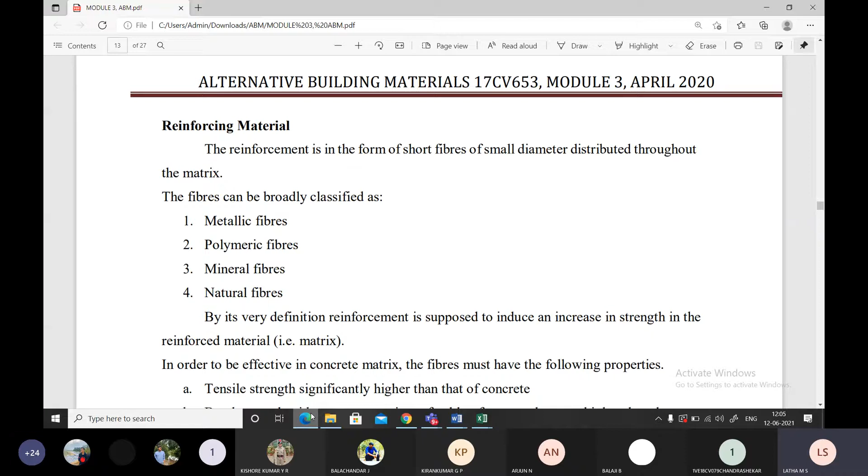Fibers basically depend upon the aspect ratio. Aspect ratio - I think you have heard about this word, correct? Yes or no, students? Aspect ratio.

Okay, tell me about slenderness ratio. Length by diameter, yes, height. It is nothing but column - for a column you will be referring, isn't it? Your height of the column to the least dimension of the column. If it is rectangular, you will take the least dimension, whether breadth or depth. So what is the aspect ratio of the fiber?

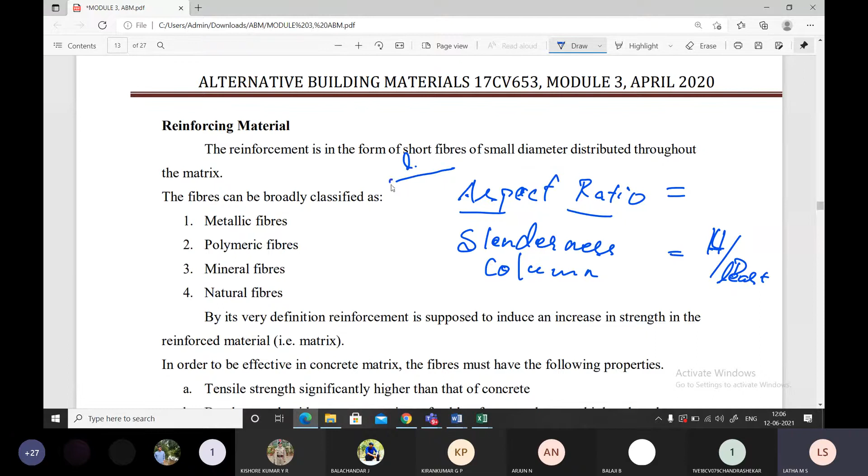Fiber, on similar lines - what does the fiber have? It has length and it has diameter. So what is the aspect ratio? L by D. L by D.

This aspect ratio, in your research work if you are using these materials, the high scope is involved in the aspect ratio. You may say, ma'am, I've used the concrete or mortar as we have discussed, and further to increase the tensile strength - fibers, why do we introduce fibers?

To increase the tensile strength, I may add metallic fiber, polymeric fiber, mineral fiber, or natural fiber. But on what basis do you add, students? Because each fiber may have different length, different diameter - one may be thin, one may be thick, and all that. So to define all that, we call it the aspect ratio.

So your research may define it - if you are taking a metallic fiber available in market, you can purchase it online or go to a shop. You may ask the aspect ratio of that metallic fiber, ranging from 0.3 or 0.35, or keep a range, and take those metallic fibers, pour it into concrete and check the strength. For varying strength, for example, I get an aspect ratio.

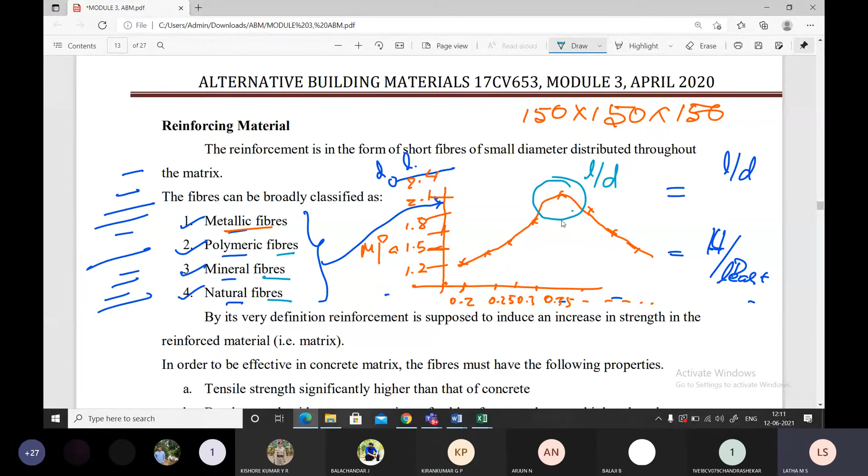You can readily think of doing a project on these - you have a project problem available here for your 8th semester I'm talking about. Okay students, so now with this, did you understand what I'm talking about? Did you follow? So I can make a calculation and determine the strength for varying L by D ratios of metallic fibers or polymeric fibers or mineral fibers or natural fibers.

You may ask, ma'am, where is it available? It is all available in the market. Got it, students? Did you get my point?

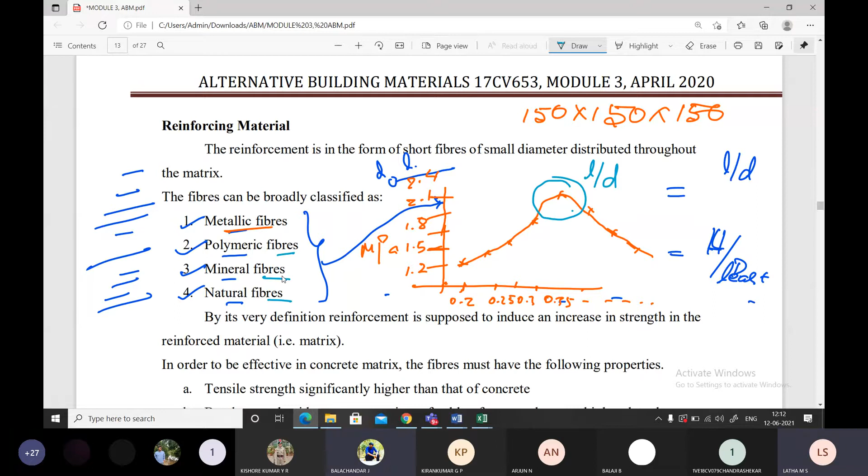Yes or no? Yes. Yes.

Now, to start with, we are talking about what properties fiber must have in order to be effective in a concrete matrix.

Tensile strength. Definitely, when I use fibers, I'll increase the tensile strength. You may ask, ma'am, how does tensile strength improve?

See what happens. For example, take this 150 by 150 cube. Picture that cube in your mind. You have that picture in your mind.

Now, usually you don't put any reinforcement for the concrete cube, correct? You just pour the concrete and test it, correct? And how does this fail? Students, if you remember, how does this fail? Fails in compression is your answer.

But how does that actually fail? I'll tell you, it will fail in shear. It will go like this. The corners will fail like this. You can see the corners will spall out. This is the type of failure you may find.

Suppose I have the same block, 150 by 150 by 150. Do you understand what I'm saying? So I'll cast this cube using this concrete, and along with that, I'll use a mineral fiber or polymeric fiber. I'll use a different color and insert some metallic fibers.

Then what happens? You may find that the crack which was originating in the form of shear may continue to originate, but it may not propagate. It may start originating, but it may not propagate. Understand? What happens there? I'll take this surface.

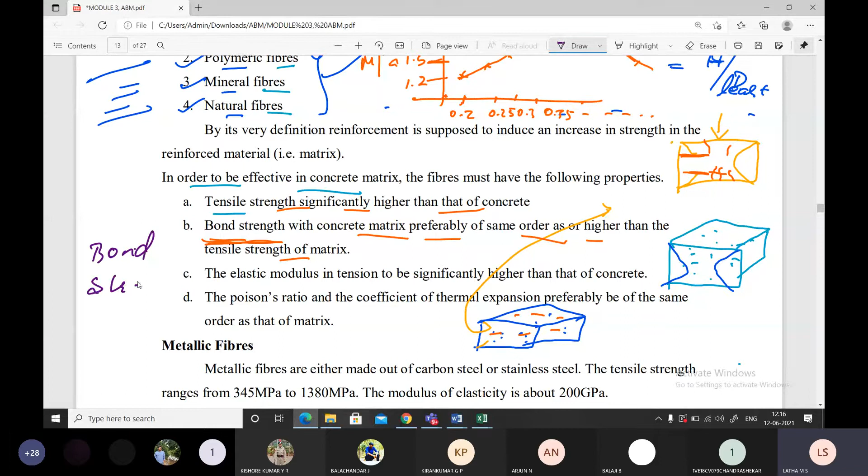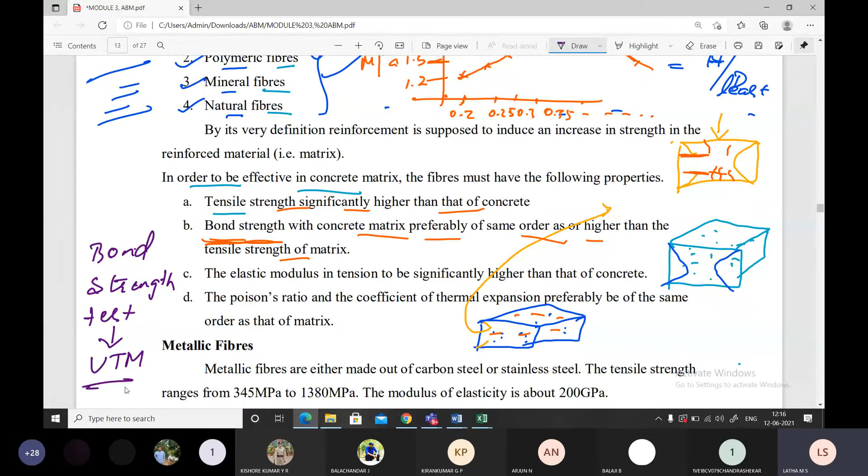You have a specific bond strength test. For this, you have a machine—not a separate machine. You have your UTM machine itself. The UTM machine itself is the bond strength test machine to demonstrate this.

I'll take another minute to explain this. I'll take one separate sheet, students. One second, please wait. I'll take this working sheet. Sorry.

Yes, students, coming back. I was talking about the bond strength test. Did I tell you about this bond strength test earlier? Yes, we conduct it on the UTM. The specimen is this way. For concrete only, I'm telling you students, you have concrete here—pure concrete, not reinforced.

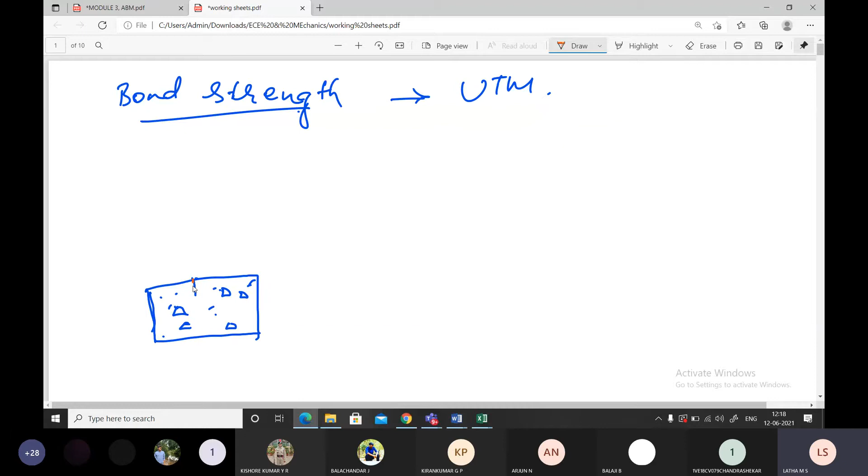And here you should make a dent. You should make a dent—I'll use a different color. This is a dent. You'll be making this dent here during casting only, and you have a reinforcement.

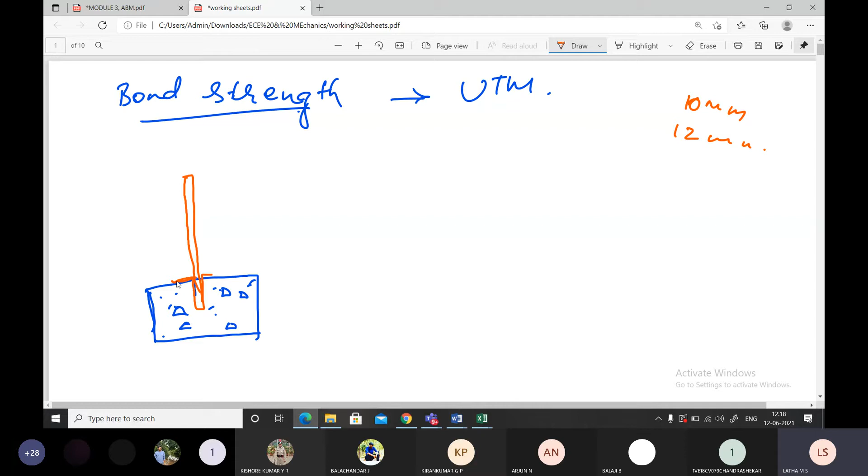If you are using, say, a 10 mm or 12 mm diameter reinforcement for casting, you have to insert this completely into the concrete. Then you have to seal it, seal it completely. Correct? That procedure is given in the ASTM code.

In the ASTM code book, you have this bond strength evaluating or determining test method. Got it? Are you getting the picture, students? This is 150 by 150 by 150 mm size. Do you follow this?

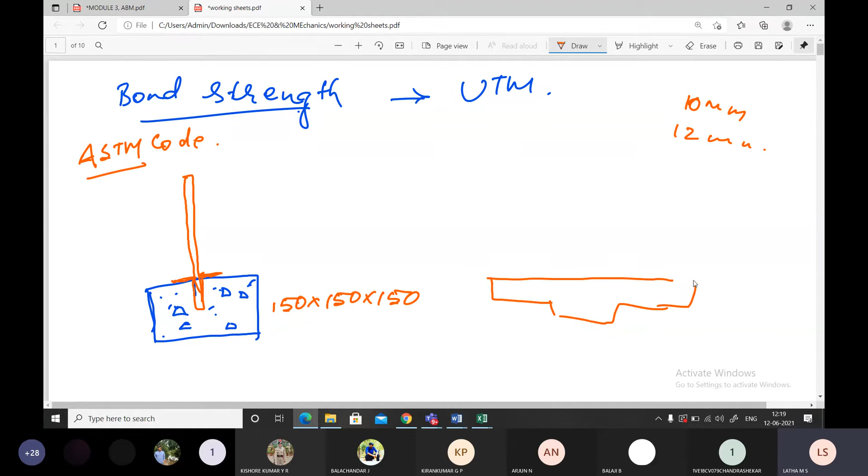Then you have to put this in the UTM machine. The UTM machine has an upper crosshead and a lower crosshead, which you have to fix. This is the lower crosshead and this is the upper crosshead.

Then you have to fix this concrete cube here, with the reinforced bar running through it. You have accessories, grips, which should be fixed here.

What type of load will you be applying in the UTM machine, students? Compression. If you apply compression, this will move. I want to check the bond strength between the reinforcement and concrete.

So to check the bond strength, what load should I apply? I should apply tension, tensile load. To apply tensile load, the crosshead should move away.

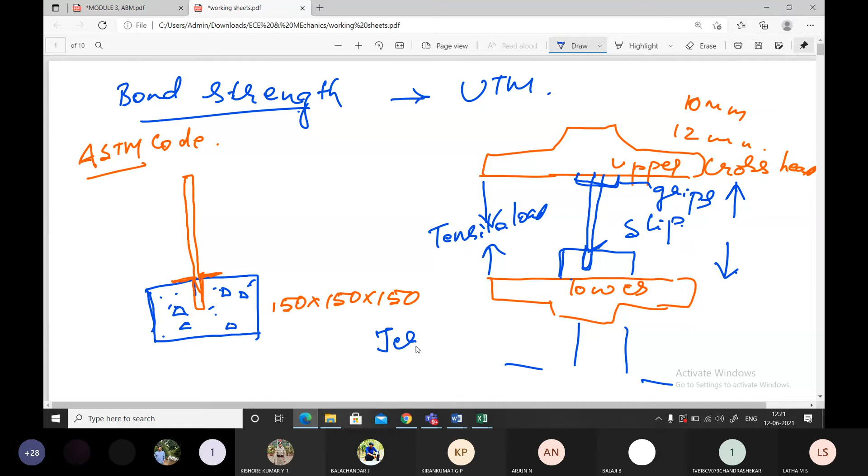At one point, there is a slip. A jerk will take place, and that jerk is noted - the jerk point or slip point. The load value and slip value will be noted and recorded. That is the bond strength value.

Hope you get some idea about what bond strength is, because this is very important, students, to know how to determine the bond strength between reinforcement and concrete. You can further run some videos available on YouTube or other channels for your general knowledge.

Bond strength has to be effective. Young's modulus in tension should be significantly higher than the concrete. Definitely, Young's modulus in tension will increase because the fibers I'll be using are for increasing tensile strength. Poisson's ratio and the coefficient of thermal expansion should preferably be of the same order as the matrix. Even when adding fibers, tensile strength, bond strength, Young's modulus, Poisson's ratio, and thermal expansion will all increase automatically without any hindrance.

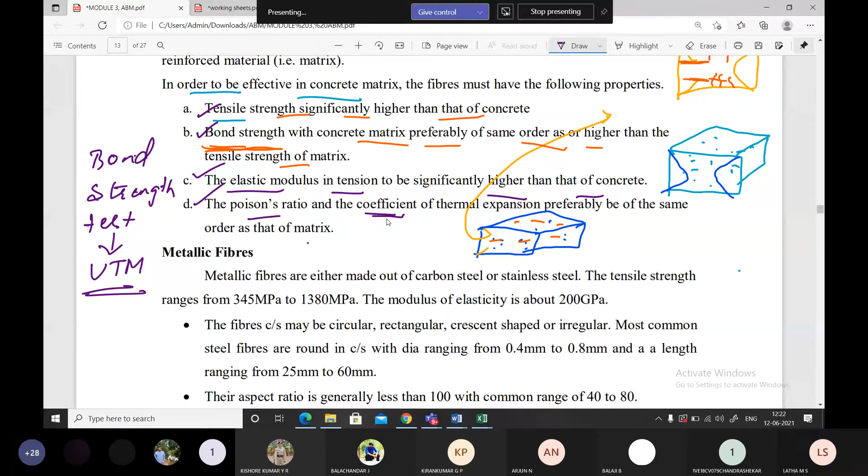Now, one by one, we'll study metallic fibers. What is a metallic fiber and what does it constitute? Metallic fiber is made up of carbon steel or stainless steel - very pure stainless steel is very costly but available. The tensile strength ranges from 345 MPa to 1380 MPa.

Can you think that it can be tested in our laboratory? No, these fibers have been manufactured at the standard level and tested. Young's modulus of steel remains the same.

The fibers may be circular, rectangular, crescent shaped, or irregular. Most steel fibers are round in cross section with a diameter ranging from 0.4 to 0.8 mm - this is the aspect ratio I mentioned. The length ranges from 25 to 60 mm.

Check on your scale, students - where is 25 mm and 60 mm on your scale? Where is 0.4 mm? Where is 0.8 mm on your scale? Where is 25 mm? Where is 60 mm on your scale?

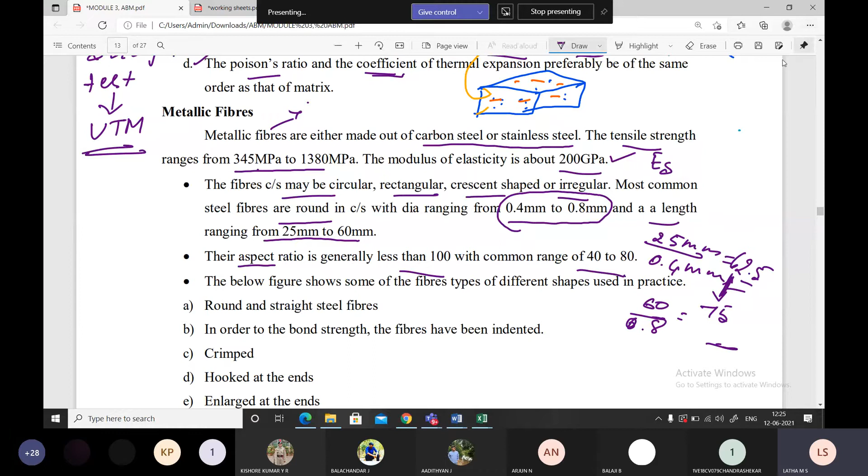So you can see the aspect ratio is generally less than 100, not crossing 100, with a common range of 40 to 80. The figure below shows some of the fibers shown in the diagram. I can go back to the diagram here to show you.

These are the fibers which are available - magnified images, students, these are all the steel fibers used in reinforced concrete. So some metals have rectangular cross section, circular cross section, with a corrugated shape outside, corrugated shape inside, but having a circular or rectangular dimension.

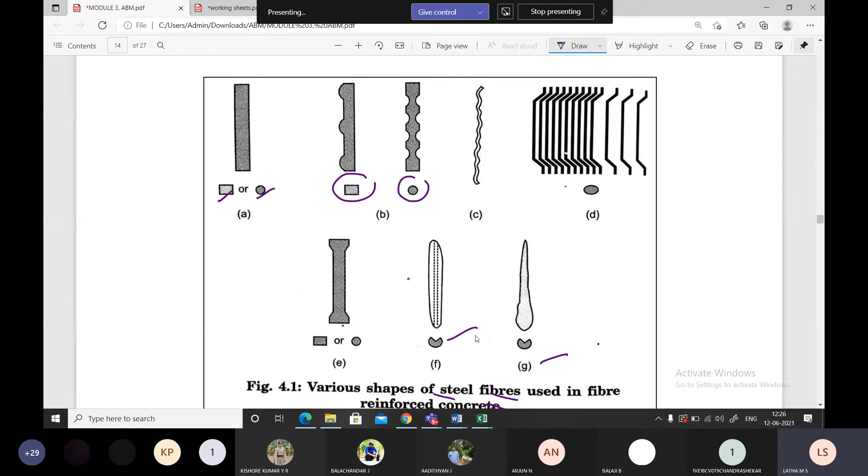This is wavelength dimension, this is a wedge shape dimension. This is a cross section, I-cross section. This is an oval shape, or this is a wedge shape - again I can call it a wedge shape. Usually we don't find this type of fiber because of slight difficulty in production, whereas these other ones are in regular production.

This is a regular in production. Even if you find this corrugated, you'll find it little difficult to find this type of zigzag or haphazard dimensions. Rectangular, circular and wedge shapes are more commonly available.

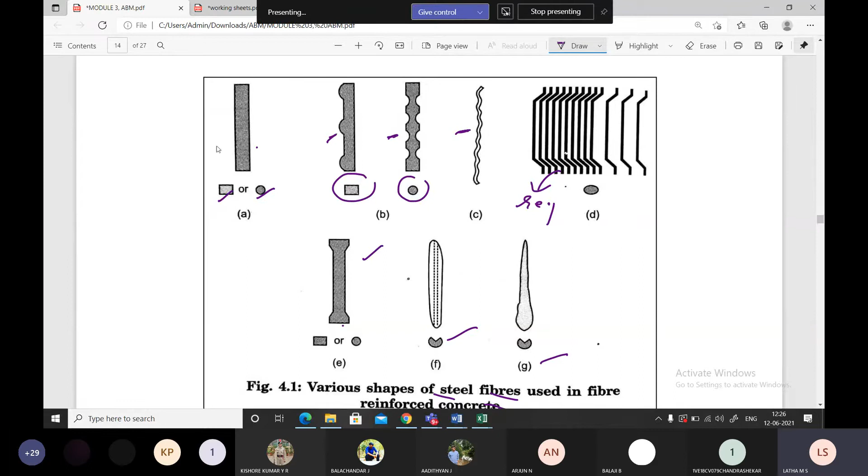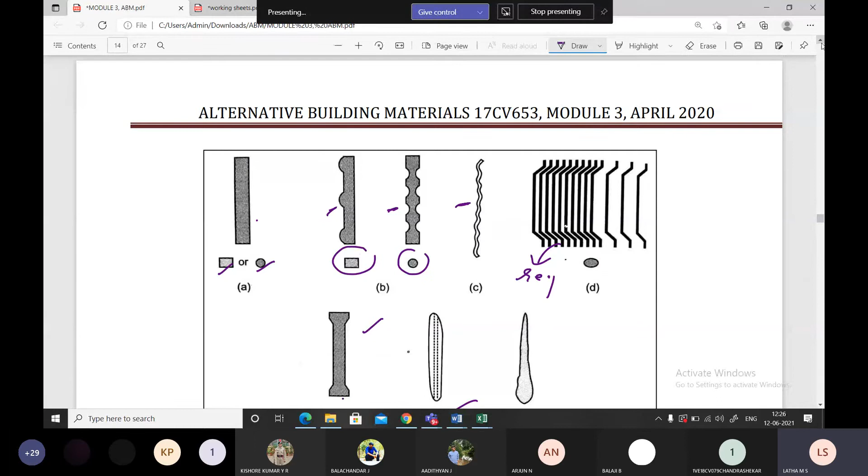So these types of fibers are available. Think of doing your project on something like this, so that you can also take it up for your MTech degree or for your PhD degree. It is not that nobody can reach the highest qualification. You can reach the maximum qualification.

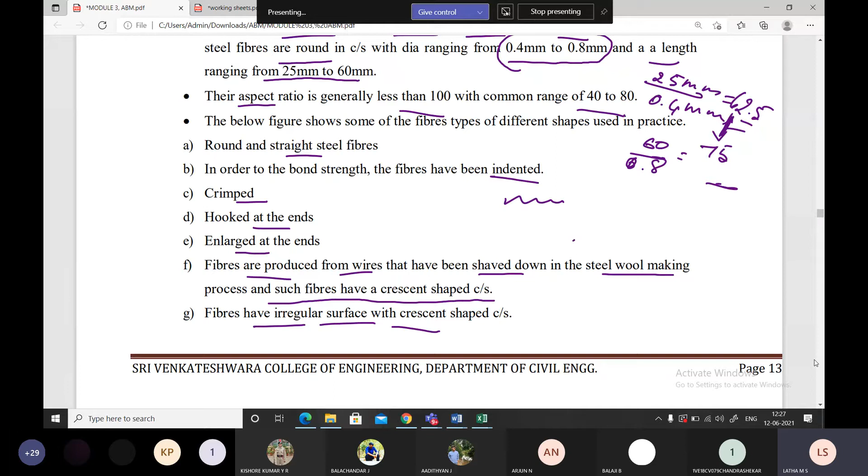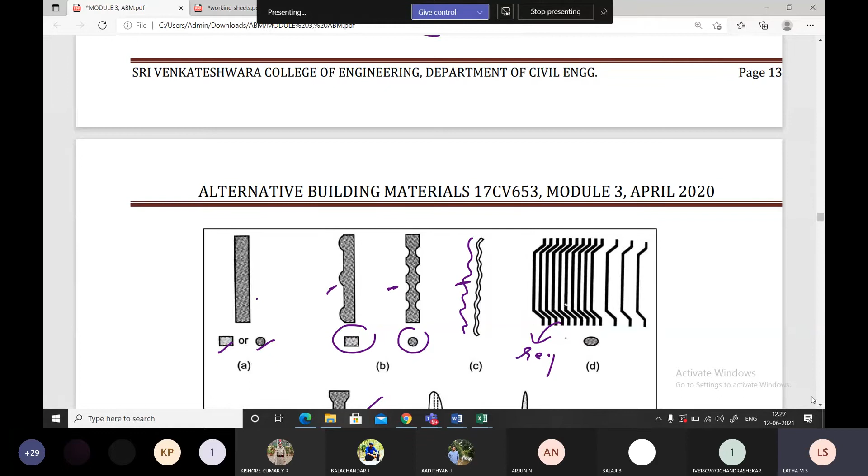That means it's a byproduct, shaved down in the steel wool making process. Sometimes it can be a waste product, or purposely it is being manufactured. Fibers have an irregular surface with crescent shaped cross section, as I said. They will have some wavy cross sections - not cross section, wavy sections, like this. So these are the different types of cross sections available in the market.

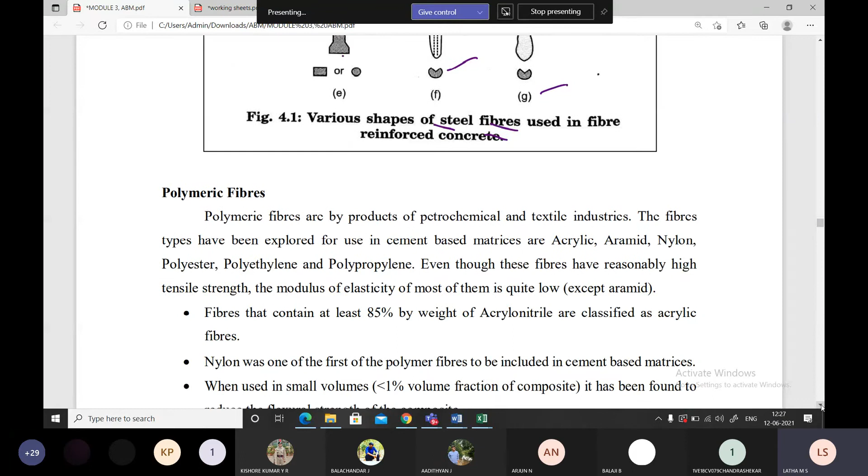Now moving on, that is all about the metallic fibers. Metallic fibers remain with the reinforced concrete, but aspect ratio varies from 40 to 80, or 40 to 100 also.

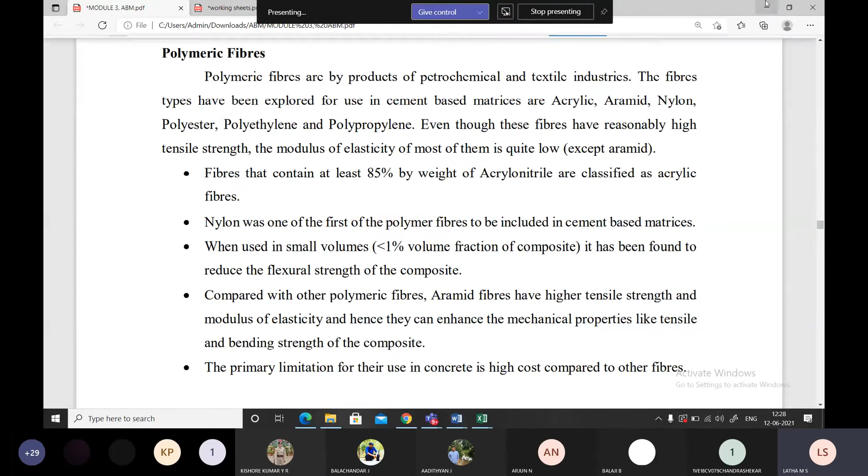Coming to the polymeric fibers - but first, are you understanding, are you following students, or are you quiet in the last hour? Very quiet. Are you alert in class? Yes ma'am, some ma'am, music is going on, like you hear that. What do you say, are you all alert? I find the regular voices coming up, I don't find some new voice, I'm waiting for some new voice to come out. Very good about the regular voices, they have very good energy. But equally other students should also participate. It's not that you're not there in class, you're also there in class, correct? You have to participate. After one year you'll all be engineers, you should know how to communicate with each other. When you learn something, interacting about it will help you a lot, students. If you interact in class, that is more than enough.

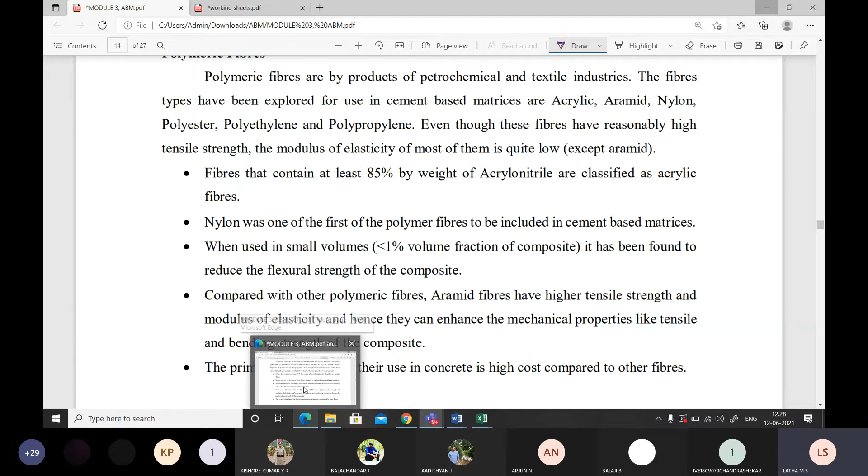Okay fine, to continue we'll go with the polymeric fibers. Polymeric fibers are byproducts of petrochemical and textile industries. These fibers have been explored for use in cement-based matrices, like acrylic, aramid, nylon, polyester, polyethylene, polypropylene. Polypropylene is very commonly available, and our MTech students are using this as the polymeric fiber.

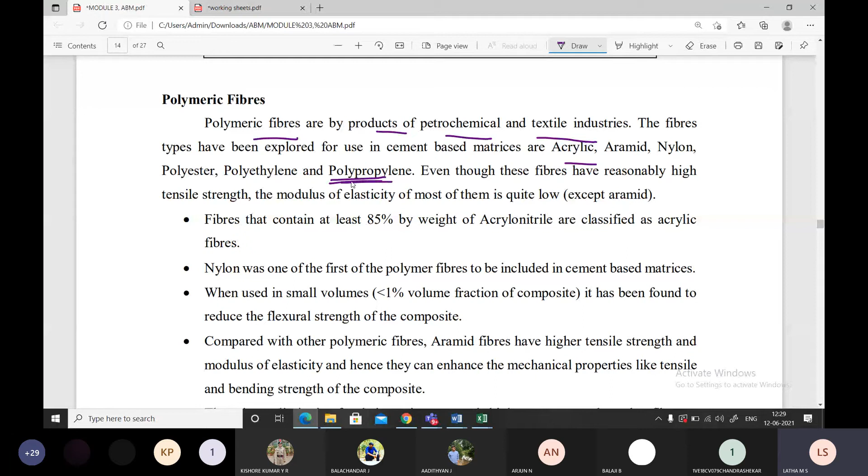Polypropylene, you can order it on Amazon or whatever, they deliver so many things at home and you can use it. Even though these fibers have reasonably high tensile strength, being polymeric fibers means they are a little plastic-bound, so the modulus of elasticity of most of them is quite low, except aramid. Aramid is a different material because it has good tensile property, but the rest all have very low elastic modulus - Young's modulus is very low because of the plastic. Polypropylene is a plastic material.

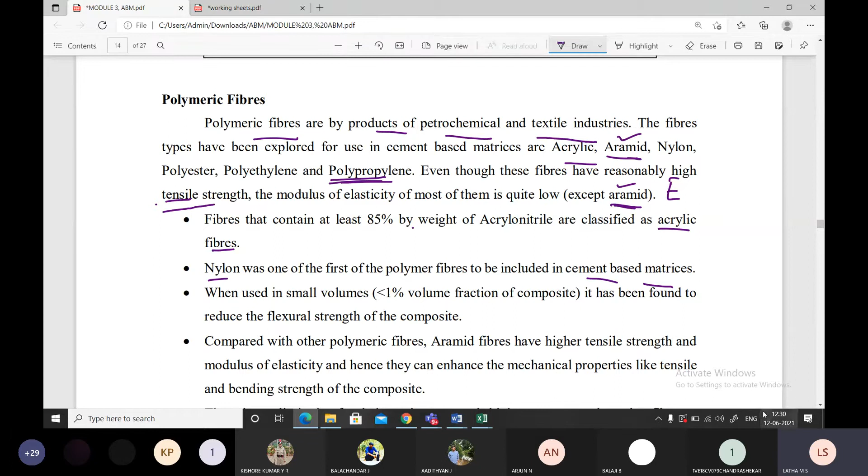Fibers that contain at least 85% by weight of acrylonitrile are classified as acrylic fibers. So depending upon the production and constituents of the fibers, we have different definitions. Nylon was one of the first polymer fibers to be included in cement-based matrices, and nylons are also being used for the production of cement-based matrices. Matrices is nothing but your constituents: cement, fine aggregate, coarse aggregate, and all that.

When used in small volumes, that is less than 1%, it has been found to reduce the flexural strength of the composite. How, students? If I have a nylon or any other material, and I have a cement weight of 20 kg, I may use 1% of that 20 kg of cement as nylon or any polymeric fiber added to the mix. So 20 kg divided by 100, whatever amount of grams you get, you'll be using that quantity in the concrete mix.

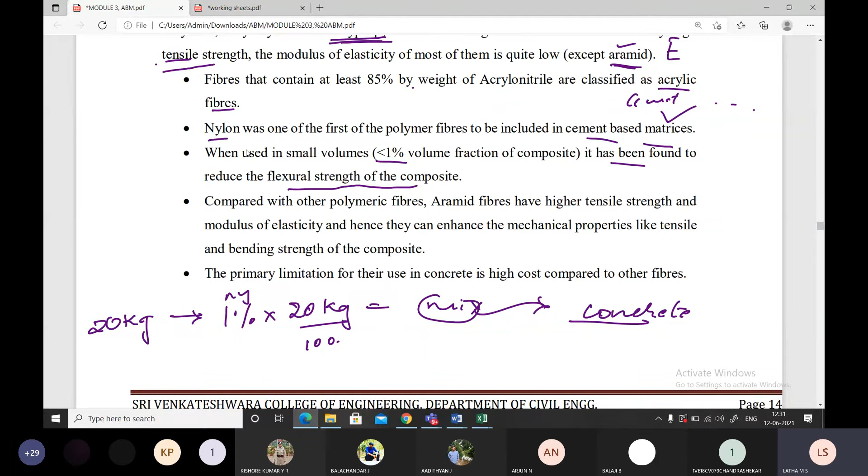It will be a huge volume because these fibers have low density, so it requires more amount of nylon material. So only 1% seems very small - you may ask, ma'am, 1% is very small, usually you had 10% and 20%, but these fibers have low density, so the volume of this will be very huge. Too much volume you get, even at 1%. For example, I say 1% of 20 kg, how much will it become? 1 divided by 100 - tell me how much it will become.

Convert into grams, divided by 100. So I require 200 grams of this fiber to be used in the concrete mix.

Compared with other polymeric fibers, aramid fibers have higher tensile strength and modulus of elasticity, and hence enhanced mechanical strength like tensile and bending (bonding or flexure) strength. The primary limitation of their use in concrete is high cost compared to other fibers. Aramid is very difficult and costly to purchase. Otherwise it is very good at mechanical strength, but I'm not sure about the availability of aramid fiber.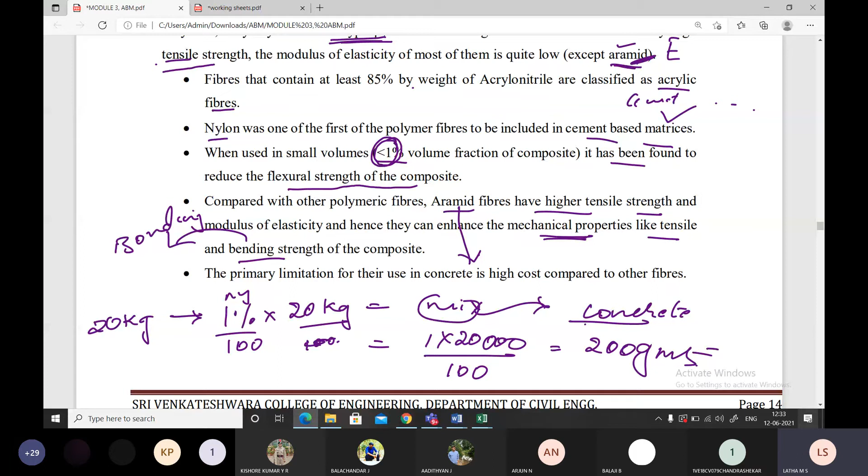Moving further down, we find mineral fibers. Glass fibers are predominantly used as mineral fibers. Glass fibers are silica-based glass compounds that contain several metallic oxides which can be tailored to manufacture different types of glasses. The major disadvantage of this, what could it be?

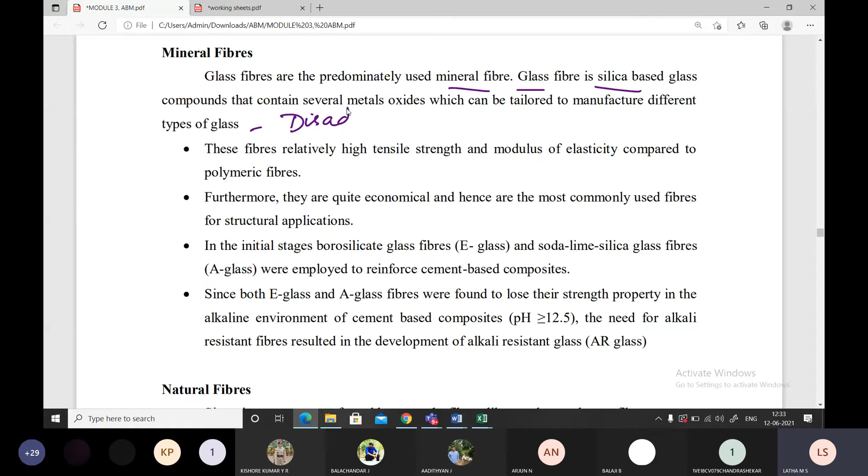As a mineral fiber, if using glass fiber, when you touch it, you may not sense that it has cut your skin and entered your body. You'll not be knowing it, you'll be unnoticed, that is the danger. You'll not be feeling that it has pierced your skin. It is such a dangerous material. Glass fiber will pierce your skin, so we really avoid such material, or when using it we must be very careful to use hand gloves and take high precautions.

These fibers relatively have high tensile strength and modulus of elasticity compared to polymeric fibers. Furthermore, they are quite economical, and because they cut our skin they are most commonly used for fibers for structural applications, due to its silica content. In initial stages, borosilicate glass fibers and soda lime silica glass fibers were employed to reinforce cement-based composites. These are the different types of glass fibers available.

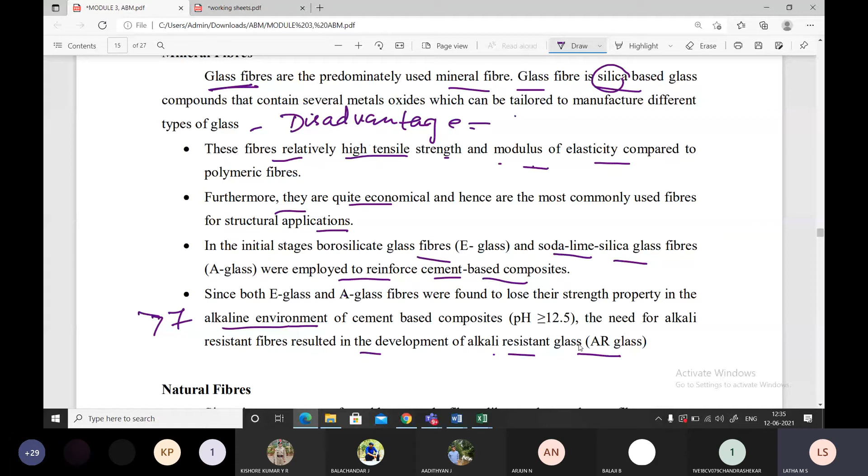Since both E and A glass fibers were found to lose their strength property in the alkaline environment, that is pH greater than 7 (less than 7 is acidic, greater than 7 is alkaline/base), they will lose their strength. The need for alkaline resistant fiber resulted in the development of alkaline resistant glass, AR glass. Through this research, they found that when it is losing its strength, it is yielding a very good result. They did more research to develop alkaline resistant glass, AR glass, which gives very good strength in the alkaline nature also.

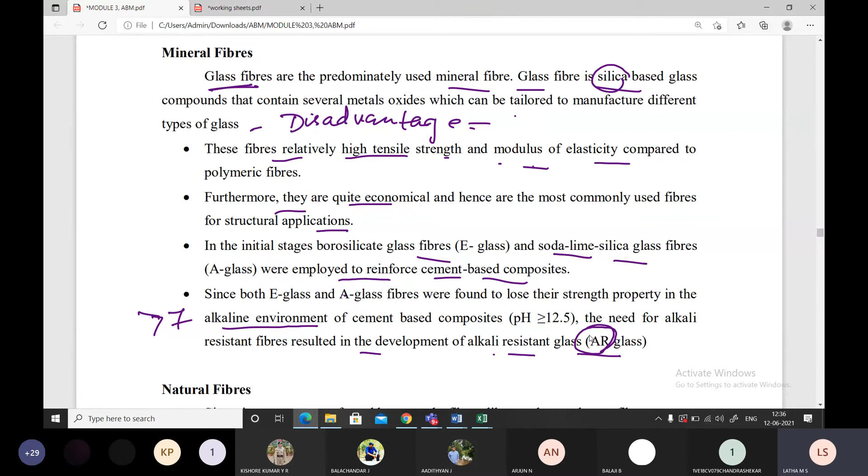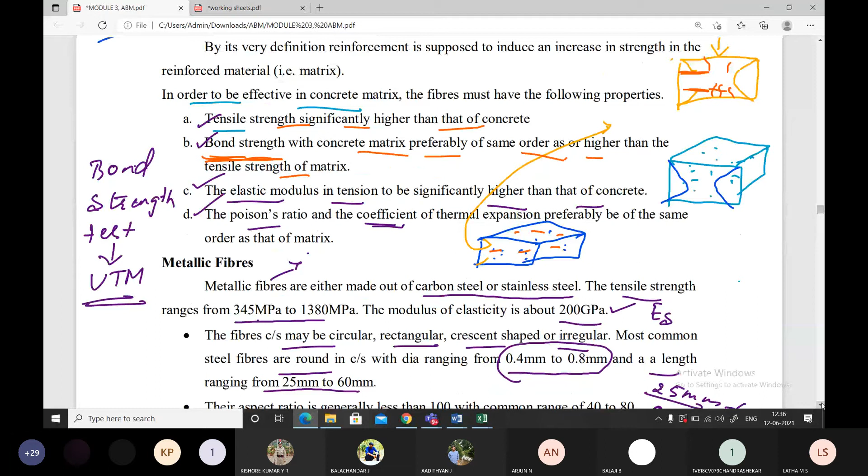So this is all about mineral fibers. Any doubt, students? You are very silent in the class. What were the three fibers we were discussing? Metallic fibers, polymeric fibers, mineral fibers.

Now we have to move on to natural fibers. Lot of scope is there, students. I just forgot to share with you one of the latest journal papers released, about concrete testing using hair. Concrete test using our natural hair. They have used this hair as a tensile strength property.

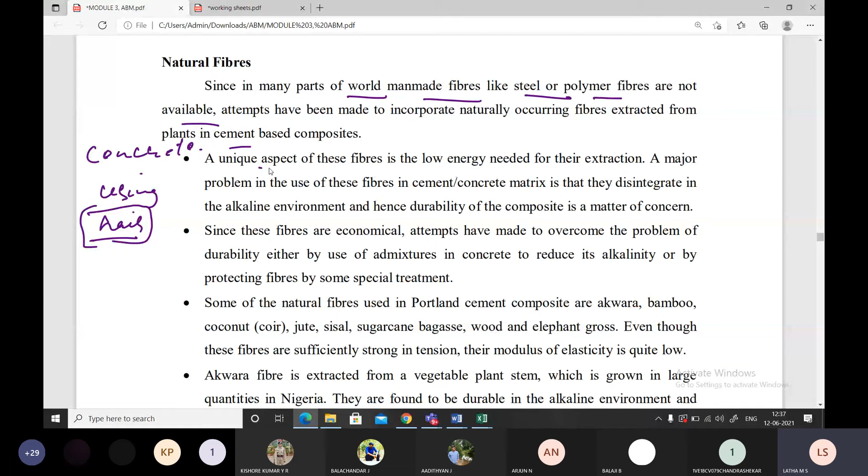It will have greater strength, to arrest or increase the tensile strength. Since in many parts of the world, man-made fibers like steel or polymer fibers are not available, attempts have been made to extract natural fibers to make cement-based composites. A unique aspect of these fibers is the low energy needed for their extraction - hair doesn't require energy to extract, it is as-is available.

A major problem in the use of these fibers in cement or concrete matrix is that they disintegrate in the alkaline environment. They don't have resistance towards the alkaline environment, and hence durability, which is very, very important, will decrease for the composite. When these fibers get damaged in alkaline material, because cement is an alkaline material, blending with a natural fiber causes it to get corroded, so the durability will not exist for a long time.

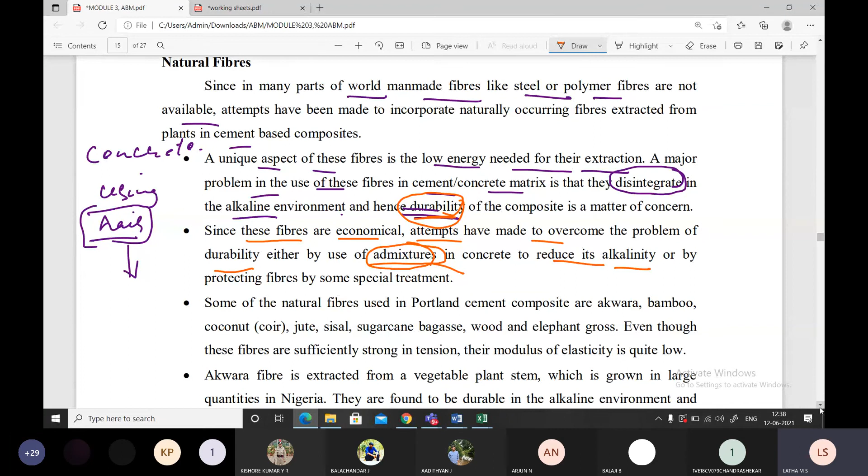Since these fibers are economical, attempts have been made to overcome the problem of durability by using admixtures, to reduce the alkalinity or protect these fibers from the reaction. So what did they use? They used admixtures - a number of admixtures are available - to overcome the alkalinity, since concrete is basic in nature and can react.

Some of the natural fibers used in Portland cement composites are akwara, bamboo, coconut coir, jute, sisal, sugarcane bagasse, wood, and elephant grass. Even though these fibers are sufficiently strong in tension, their modulus of elasticity is very low.

This is very important - Young's modulus is very low. Even though these fibers are strong in tension, they can expand and have good deflection, handling a greater tension load, but Young's modulus is very, very low.

Akwara fiber is extracted from vegetable plant stem, which is grown in large quantities in Nigeria. They are found durable in alkaline environment and dimensionally stable under alternate wetting and drying conditions.

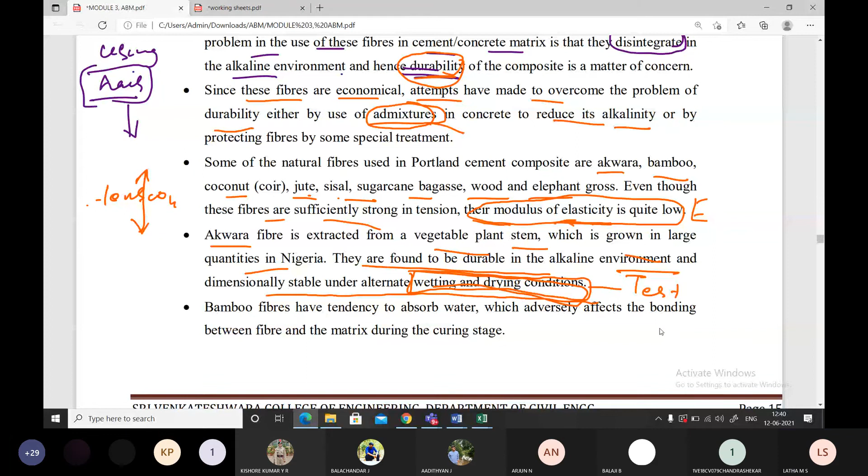What do you understand by wetting and drying condition, students? Climate change - yes. How do you test this? Do you have any test for this? Correct, your climate changes, whether there's a summer session or winter session. Do you have a test for this? Yes, you do have a test for this.

Freezing and thawing - freezing and thawing test. I'll tell you. You can Google it now itself, you can see ASTM freezing and thawing.

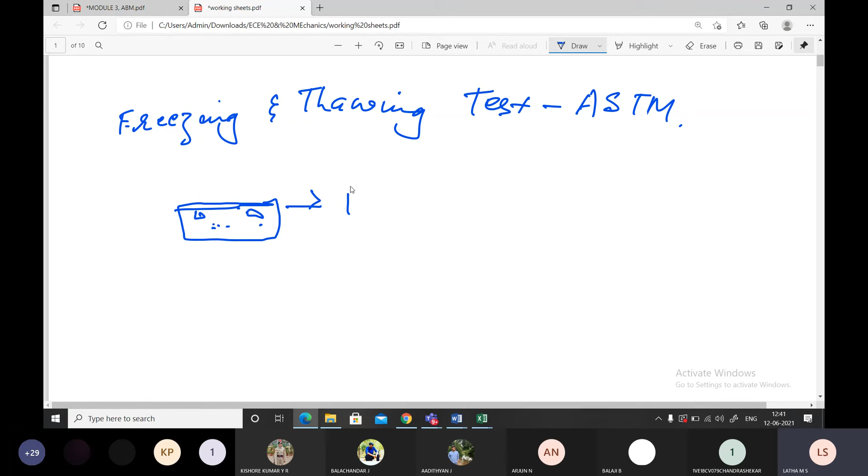Take, for example, concrete block. You understand concrete blocks very well. You freeze it at -5 degrees - it is not +5, it's -5, that is the freezing temperature. And thawing, you'll be thawing at 70 degrees. You can Google search and see the temperature, it will be 70 degrees.

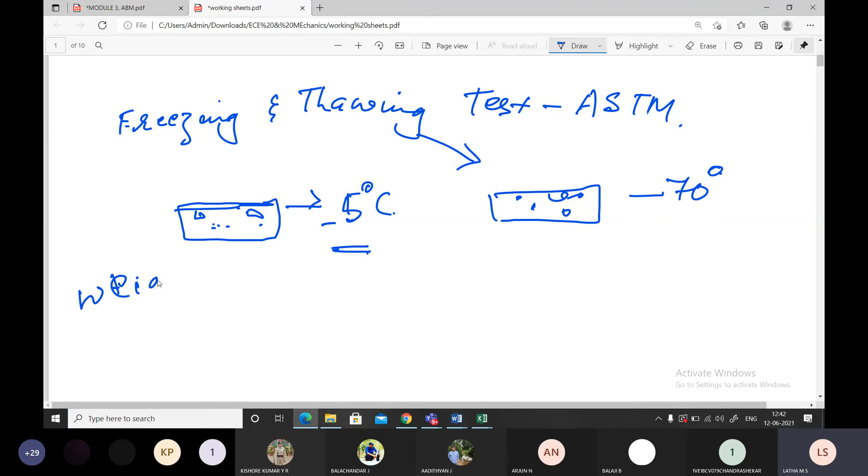What happens during the process? Every time when you are freezing and thawing, you have to measure the weight. Are you following, students? Am I boring you? Weight has to be checked - before freezing the block, I check the weight W1. Then when thawing the same block, again I check the weight, W2. Now I check the difference, W1 minus W2 divided by W1.

This gives the loss in block weight - the percentage of loss you may get is about 0.003%. So this is nothing but wetting and drying, that means freezing and thawing. One more test - wetting and drying, aside from freezing and thawing.

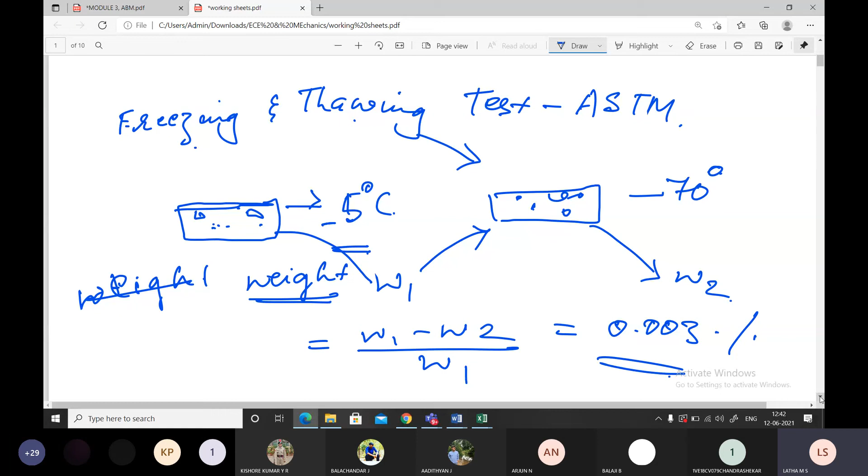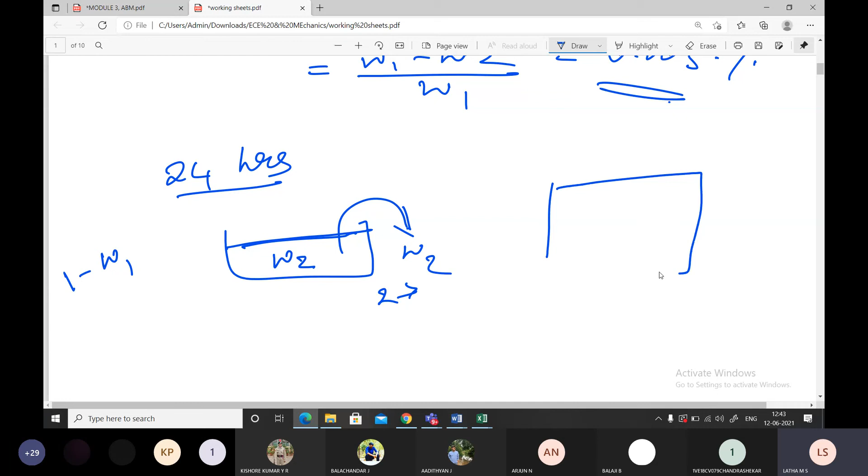You can immerse the block in water for 24 hours. Before putting it in, you measure the weight W1. Then you measure the weight W2 after taking it out from water. The same W2 block is kept in an oven at 110 degrees Celsius, and this becomes W3.

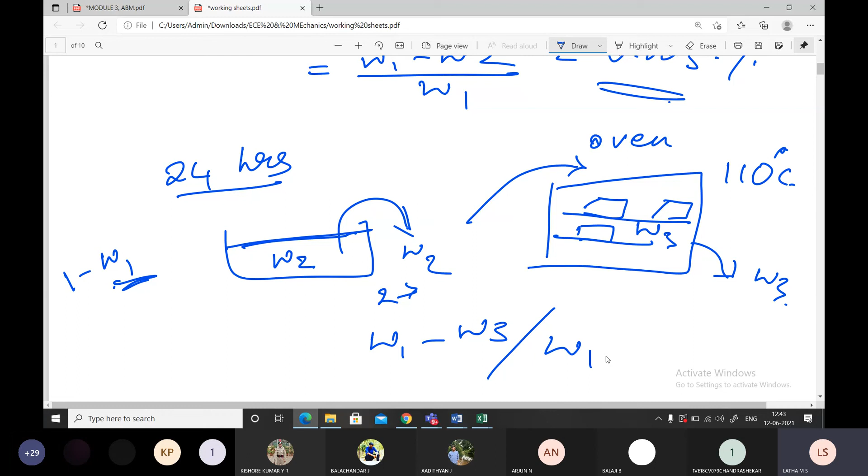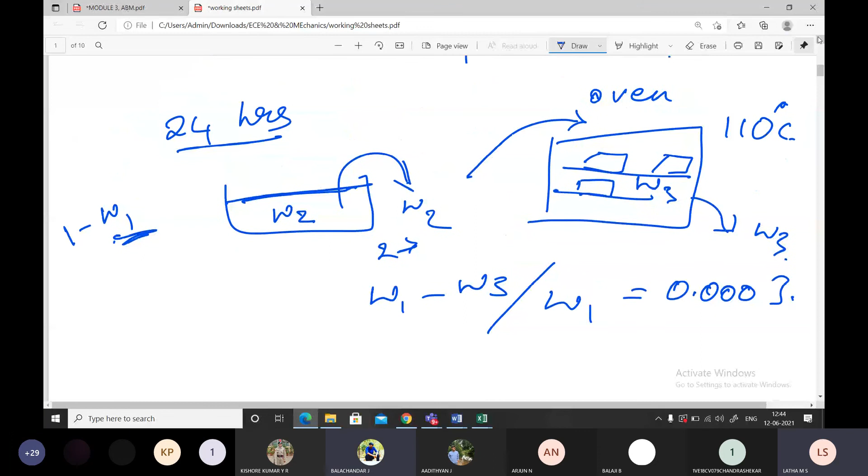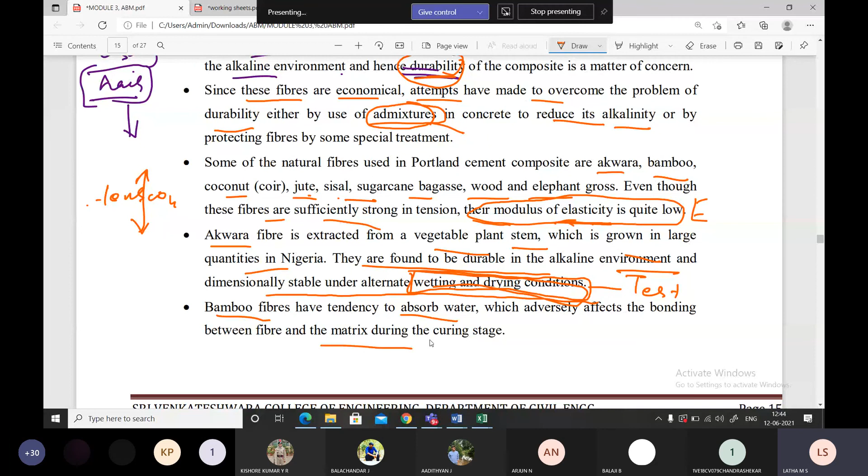Similarly, bamboo fibers are not a good material because they are adverse in nature, absorbing a lot of water, especially during the curing stage. I'll finish this and end the class. Fibers extracted from coconut or coir are short in length and found to be sensitive to moisture change.

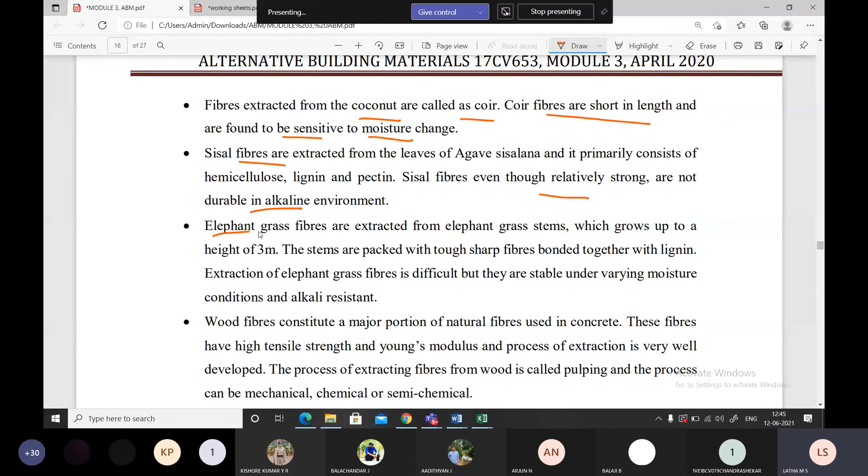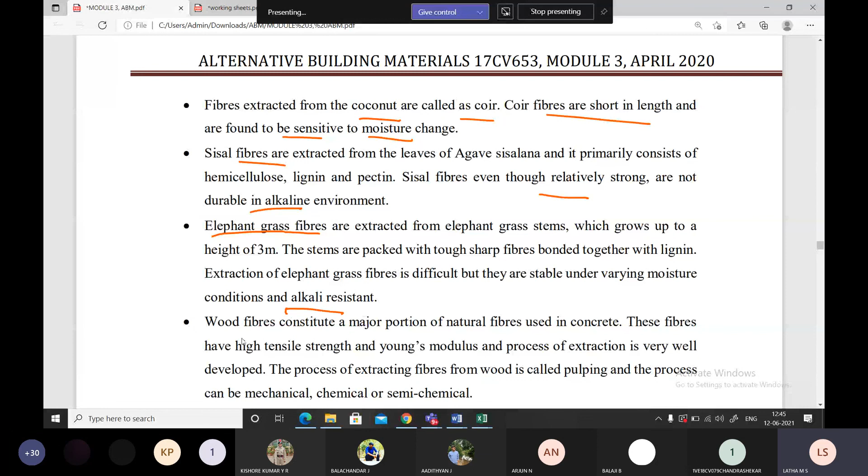So these are the problems we come across with natural fibers, which is not allowing us to use the natural fibers as they are. So we are going for other new materials - polymeric materials, fiber materials, and metallic fibers.